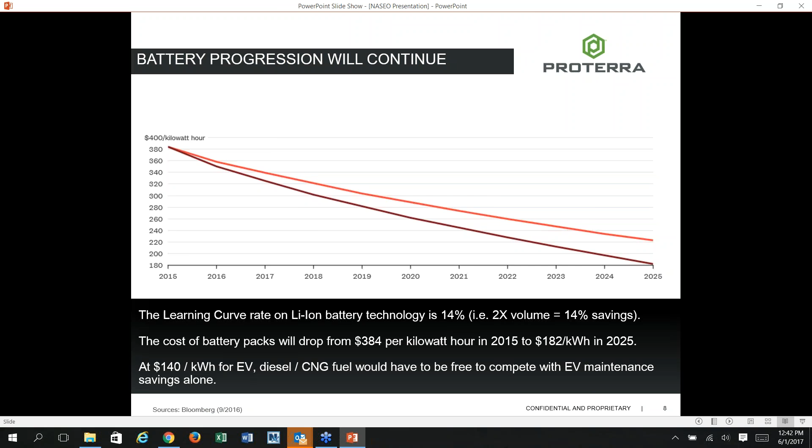So now, just a little bit about the Proterra bus. It's a purpose-built bus that offers the highest performance and flexibility in terms of energy storage, and we also offer multiple charging options and multiple ways to make the purchase, because as I showed you earlier, we are still more expensive than a diesel or CNG competitor.

Now, what makes us different? Well, our buses are made of high-tech carbon fiber reinforced composite material. Think Formula One race cars, offshore power boat racing, or like Learjet hulls.

So it's super strong, it's lightweight, it doesn't rust. We have customers in New England that will show us a comparison of buses after 4 or 5 years. Our buses have no rust, while the other parts of their fleet are covered in rust.

And LA Metro just put out some information on their composite body buses that are looking like they'll last almost 18 years, the shells, without flex or degradation. That composite material allows our bus to be lighter and have more seated passenger space, because the batteries are down outside the passenger compartment, lining the floor of the bus. That lighter weight also contributes to a higher efficiency rating, allowing more miles per kilowatt hour.

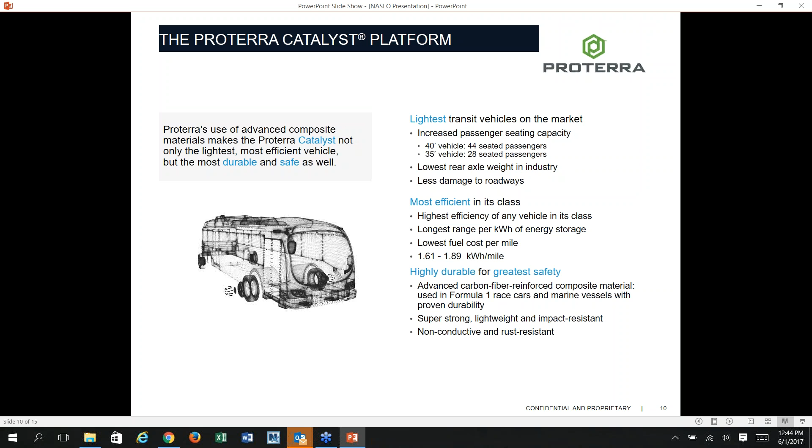As I mentioned, we have multiple charging options. When we first started, all we had was the high power overhead, which will be featured in the upcoming NREL study you'll hear about shortly. But now we've launched a depot charger at the request of our customers. They wanted to more mirror their fossil fuel experience - they want to charge overnight and run all day.

Along with one other manufacturer, we've chosen to use the plug-in standard that's accepted across the board in the U.S. and used for all passenger vehicles, J1772 CCS. That allows a municipality or transit agency, working with their public works department or other fleet vehicles, to use the same charging infrastructure for their buses as for light-duty vehicles, medium-duty trucks, repair trucks, and fleet cars for the city.

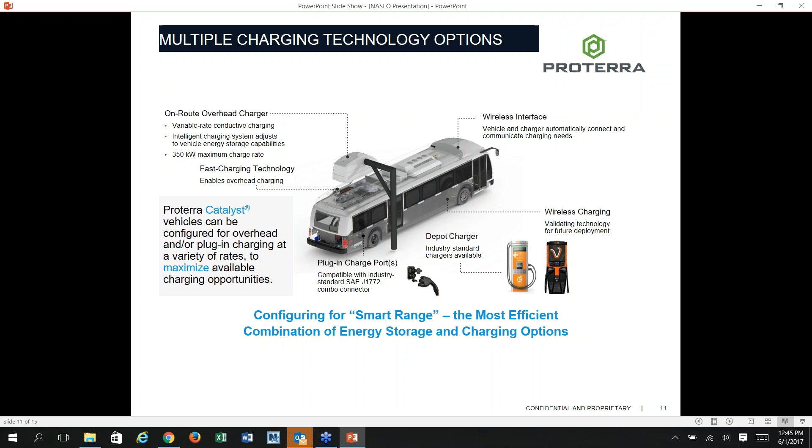So they don't have to have multiple charging scenarios - they can use one technology for multiple options. This charging standard is widely deployed and ubiquitous, and there's a host of entities out there that know how to install it to great advantage. That's one of the other reasons - there are standard groups within Black & Veatch and others like Schneider Electric. There are multiple contractors across the U.S. that have deployed this type of charging infrastructure, making it an easy transition for transit agencies.

Now, you'll see that we are right now not at cost parity - we're more expensive, but we have a lower operational life cycle cost over the life of the vehicle. We haven't reached the 12-year life cycle mandated by the federal government, but the numbers we're achieving now with our second-generation bus indicate total cost of ownership savings in the neighborhood of $400,000 to $450,000, depending on your electricity costs. That's over a full 12-year federally mandated life cycle, and most transit agencies keep their buses on the road longer, 14 or 15 years even, which would increase their savings.

Electric motors are very simple - they've been around forever. Fewer parts, less maintenance, et cetera. So that's one of the drivers of being able to recover that total cost of ownership in relation to the higher upfront cost. But we realize that's still a problem.

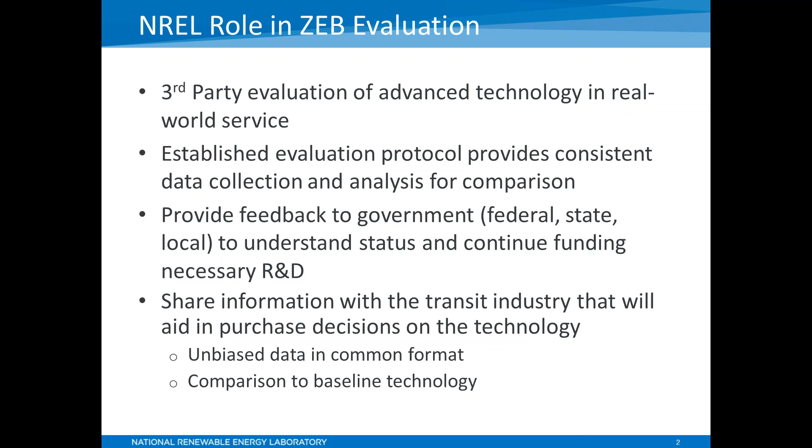There are a number of OEMs besides Proterra that are offering electric buses, and for me, electric buses or zero-emission buses include both battery electric and fuel cell electric. The rest of the presentation is going to focus on fuel cell or battery electric, but here's a list of manufacturers that are providing a number of different sizes for battery buses and fuel cell electric buses.

That includes BYD, and Eldorado National has a fuel cell electric bus. Gillig has recently started a demo of their first battery electric bus. New Flyer does both battery and fuel cell electric buses. Nova has a battery bus, and of course Proterra has battery buses, some with either fast charge or plug-in with extended range. You've already heard Kent mention those from Proterra.

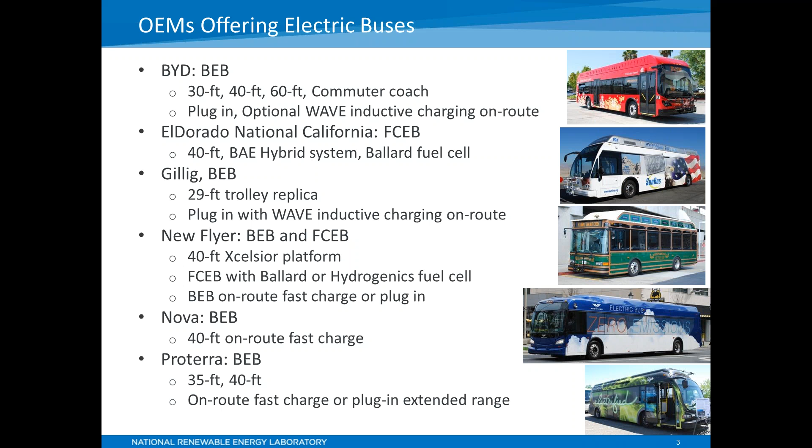To look at what our objectives are with our evaluations, several years ago in 2012, DOE and the Federal Transit Administration established targets. A selection of these targets is shown in this table. They were developed originally for fuel cell electric buses, but the performance targets are the same as what you'd want any bus to meet, so we apply those to our battery electric bus evaluations as well. We look at them compared to the targets, but also compare them to conventional technologies in the same service.

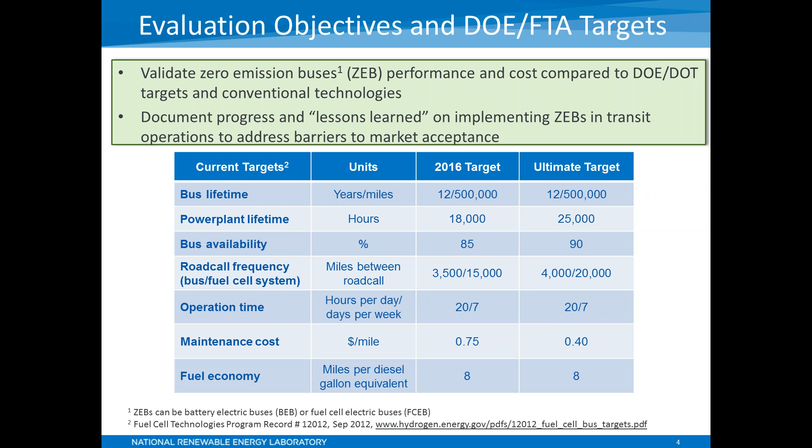This chart shows you the status of the battery electric bus fleets that we're working with. Right now we're working with 4 fleets, but this includes the 2 that we actually have published data for. That includes both Foothill Transit and King County Metro, and both happen to be Proterra fleets. I'm going to show you some detailed data once we move forward, but this gives you the overall status as we see it right now. The columns show you the bus with the minimum, the bus with the maximum, and the fleet average, as if all those buses were one fleet.

You can see that some of the targets that have been set have already been met. We're seeing 2x fuel economy compared on a diesel gallon equivalent basis. The road call frequency is much higher than the targets for bus miles between road calls - the target's 4,000. For the energy storage system, it would be similar to what we'd see for the fuel cell; we want to see at least 20,000, and you can see it's much, much higher than that.

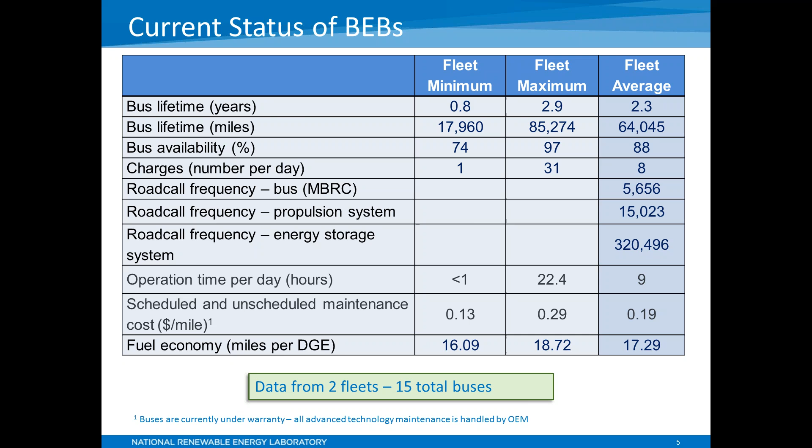So first we'll talk about our experience with Foothill Transit in West Covina, California. They started their battery electric bus program with a demo, a pilot project with 3 buses, but our evaluation starts with their 12 buses that they got and put in service in April 2014. We've been following this fleet for a couple of years now, and we have one report that's been published, with another in its final stage that should be published and posted in the next 2 weeks.

So 12 buses - these are the 35-foot Proterra buses with fast charge on route. And for comparison, their baseline fleet is the CNG NABI fleet, which are 42-foot buses.

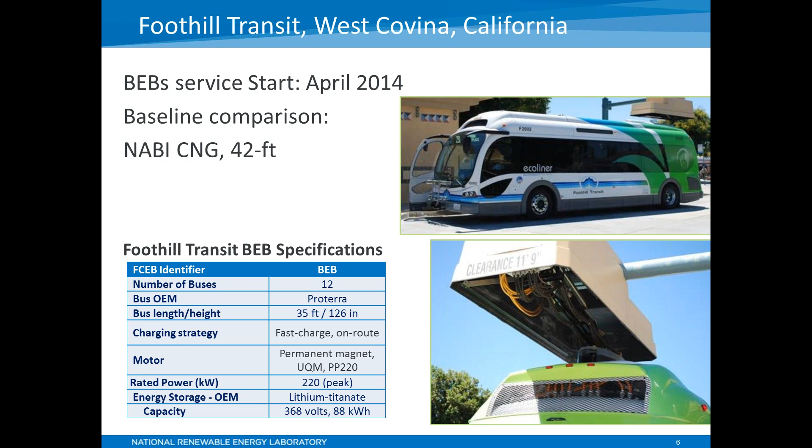This first chart shows you the efficiency, which we look at in diesel gallon equivalent. For both the CNG and battery buses, we have converted those to diesel gallon equivalent. The battery bus is in green, the CNG bus is in blue. You can see we've got about 4x higher than the CNG buses. The cost of electricity makes it a little higher to operate per mile because of demand charges.

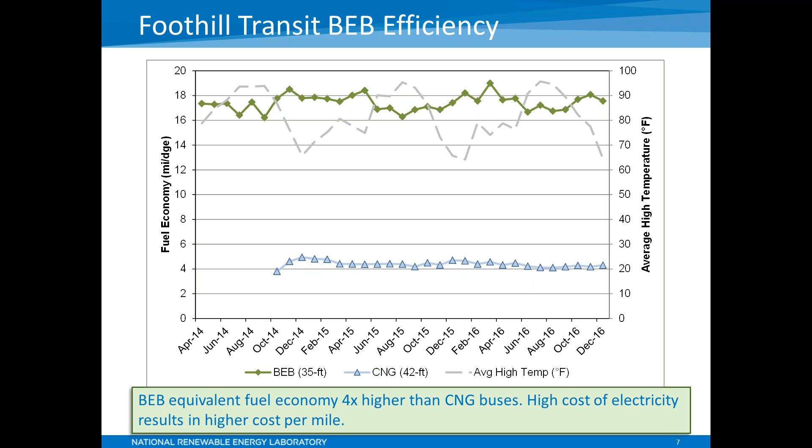If you look at that light gray line, that gives you the average daily high temperature for the month. You can see in some cases you have a little bit of fluctuation based on accessories. You might see the efficiency go up or down, whether it's summer or winter driving.

This chart shows you availability, and our availability numbers are if the bus is available for morning pullout, and this is the monthly average for the fleet. You've got the battery buses in green, CNG buses in blue, and the general transit target of 85% availability. Both the battery buses and CNG buses were new when they went into service, and they have really good availability over the time. The vast majority of the time it's over the target.

The few times that it was not over the target, it was usually due to bus issues. So the overall availability for the battery buses during this period was 90%.

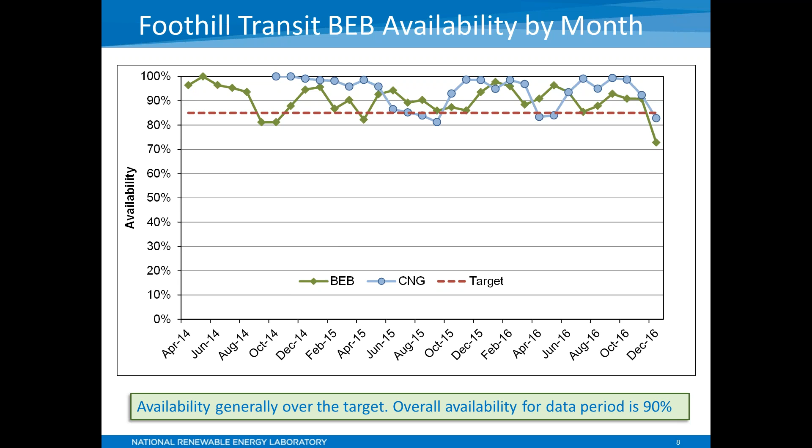Looking at what the reasons for unavailability are, these 2 pie charts show you the 90% availability, 10% of the time the buses were unavailable, and the second pie chart breaks down the reasons for unavailability. If you count the preventive maintenance, which is your PM, and the bus, more than half the time it was bus issues, things like doors, wheelchair lifts, things like that that might cause a problem with the bus.

2.8% of that time it was some electric drive issues. In some cases those were due to some software upgrades that, once they were done, they didn't have issues with the problems after that.

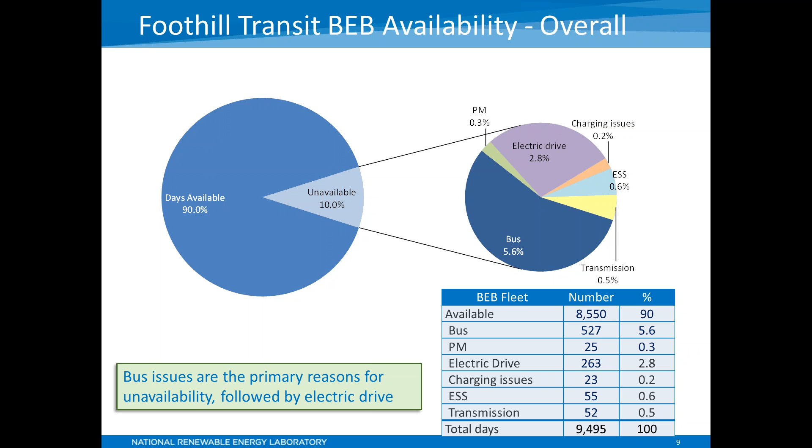If you look at reliability, transit measures reliability as miles between road call. These 2 charts - the chart on top gives you the overall miles between road call for the battery buses and the CNG buses, and the ultimate target set by DOE and FTA of 4,000 miles between road call. You can see that we're already meeting that target with the battery buses.

What this number is, it's chargeable road call, so it doesn't include things like head signs or fare boxes or things like that. It's something that would stop the bus from being operated on route or would cause a safety issue and have to be pulled from route. So you can see the battery buses that we're seeing right now have met that target.

If you look at the lower chart, it shows you propulsion miles between road calls. If you look at only the road calls that are due to problems with the propulsion system, that's the light green line for the battery electric buses, and it's hovering right along the target for the battery systems. Then if you look at the orange line, that's road calls only due to the energy storage system, and you can see from the chart that it's a steady increase, meaning they're having no road calls for the battery systems itself, which is really positive for the technology.

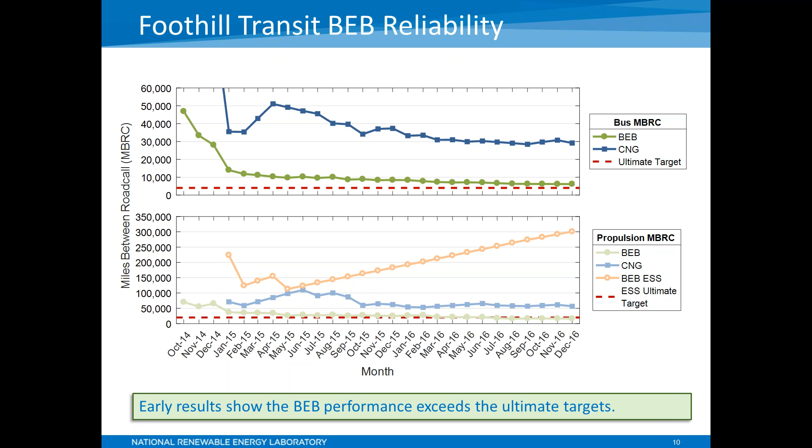So that was Foothill. Let's switch to King County Metro. They have Proterra buses as well, but these are their 40-foot Catalyst buses. There's 3 of them, and they're also fast charging. They have 8 more buses on order.

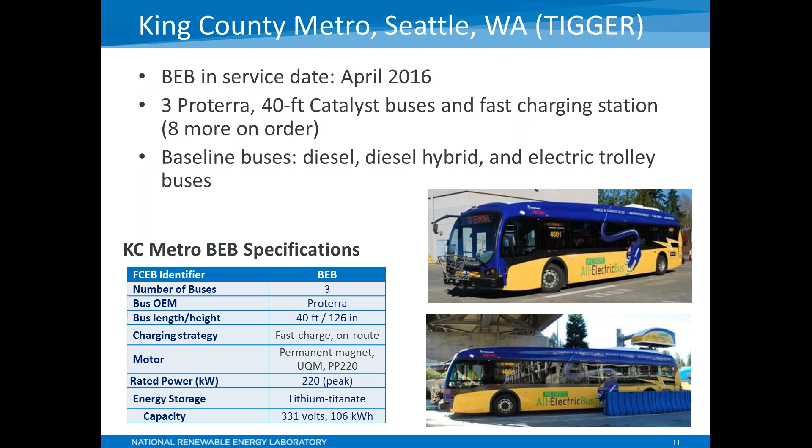Interesting thing about King County, we have 3 different baselines for King County. We've got diesel hybrid, and electric trolley, and all of them are new, so we've got some great apples to apples comparison. They're all 40-foot buses. You can see some of the specifications for the buses at King County.

If you look at the efficiency for the King County buses, we've got a report that was just posted that has this data in it, but also diesel gallon equivalent. You can see the battery buses are still more than 3 times higher than the baselines in similar service. You can see the diesel fleet, the standard diesel fleet, in the brownish color, and the hybrids in the blue, and 2.6 times higher than the diesel buses and the diesel hybrid buses.

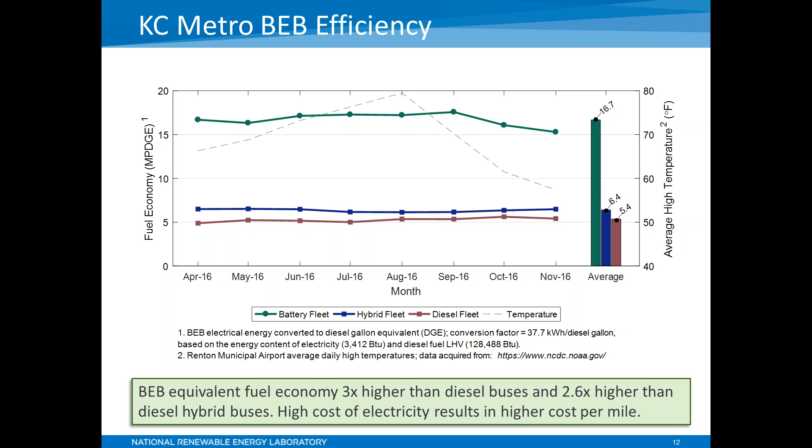Once again, the cost of electricity for this fleet - they have some high demand charges, so they have a little bit higher cost per mile at this point because of the charge for electricity.

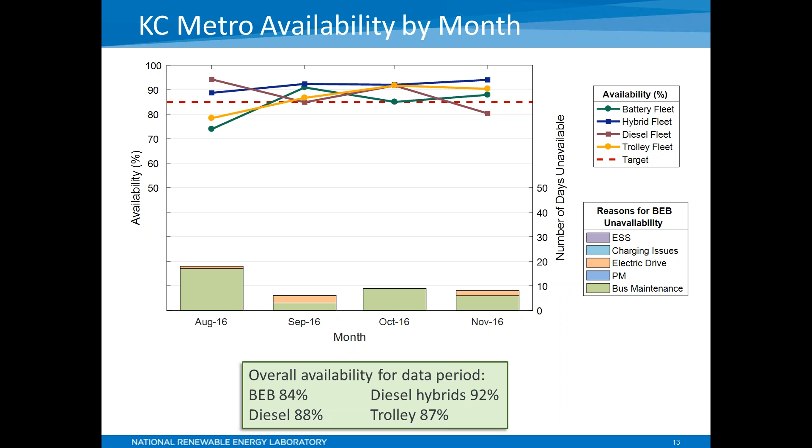If you look at availability for the KC Metro fleet, you can see all 4 of our baseline buses, the trolley fleet included here, and they're all right about the target or over the target, including the battery bus fleet. The stacked bars at the bottom show you by month the number of days unavailable by category. So you can see that bus maintenance is the primary category that's caused issues, followed by a few issues for the electric drive system. And at the bottom, you can see the overall availability for the period, with the battery buses being at 84% over that time period.

One of the things we've talked about with our fleets is what are the remaining challenges and barriers for zero-emission buses. For battery buses, the fleet needs to work on build out of opportunity charging stations if they're going to do fast charge stations. Also look at how to expand to larger fleets for garage chargers. If you're going to plug them in overnight, you've got to have a spot to do that, and that can be a challenge for fleets. It's not unsurmountable, but it's something they have to think about as they add battery buses to their fleet.

Routes for the technology: if you're using fast charge, you need to think about what routes you have and where you can put those fast chargers to accommodate those routes. If you're doing in-depot charging with longer range, then you can use it on other routes within the service.

The challenges of electricity rates and demand charges is one of the big ones our fleets have seen, and most of them have worked with the local utilities to try to work different rates, waive demand charges, or at least get special EV rates that would keep them from having to spend a lot of their money for electricity. I mentioned scaling up for larger fleets, that they need to figure out how they can accommodate plugging in and charging a larger number of buses and parking them.

One of the things we need to see is the training transition for the maintenance staff, and this is happening with some of our fuel cell fleets, and I think we're starting to see that with the battery fleets as well. We need to see that maintenance being transitioned to the actual fleet.

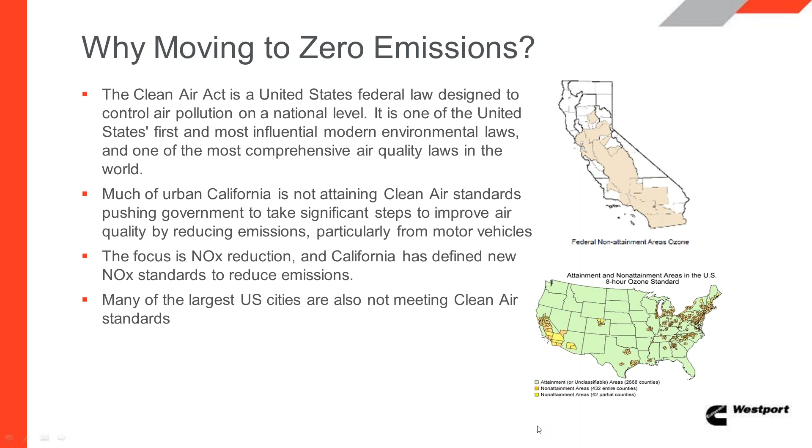Next slide is basically our new marketing term right now, which is move to zero. We are very close to zero right now with our natural gas products. In 2018, at the end of this year, 2 of our 3 engines will be at 0.02 gram NOx, and the 6.7 liter engine will come in at about half of that, so 0.1 gram NOx. Pretty significant when you compare that with other combustion engines, particularly diesel engines that are at 0.2 gram NOx.

So we think that's a pretty big deal, and I think we've got quite a few partners along the way that believe in the same thing. We're really excited about this.

Next slide. This graph basically shows the move to zero with a sub-zero carbon intensity. When you use our natural gas engines with renewable natural gas, you go into a negative number. So if you are an operator, a fleet, or a property looking for a maximum amount of greenhouse gas reduction and NOx reduction combined, we think our engines get you to that point very quickly.

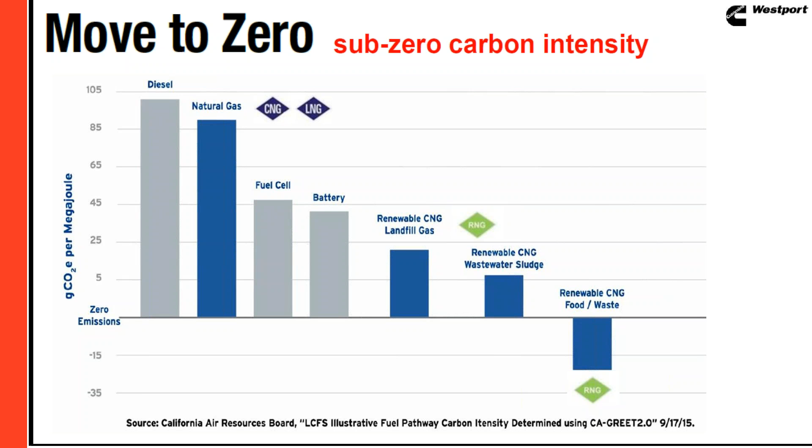Next slide, number 8. As I mentioned before, we are upgrading a lot of our engines for 2018. Both the 12 liter and the 9 liter will be at 0.02 gram NOx. They will have onboard diagnostics deployed, and I consider this to be a top-notch option for anybody looking to move their properties to ultra-low emissions with a very clean product.

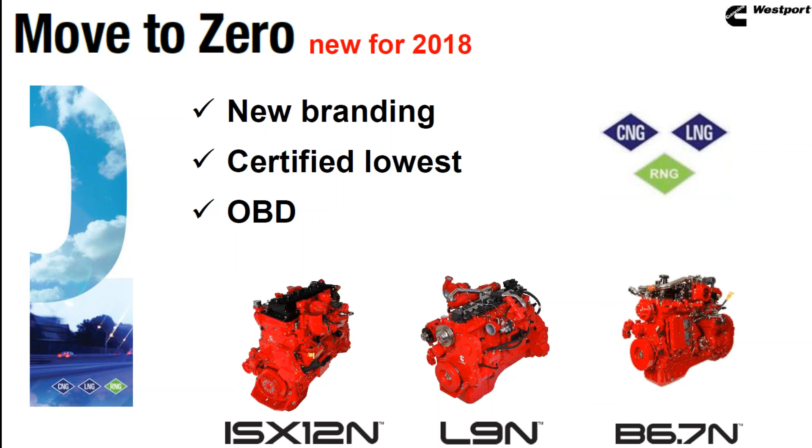Slide number 9. This is the basic information of the profile for the 12-liter engine, typically used in less-than-truckload applications, Class 8 trucks. Amazon, UPS, FedEx will be operating those.

UPS is the largest fleet in the United States running our natural gas 12-liter engines, and they'll be buying a significant amount of our near-zero, ultra-low NOx engine, actually running on renewable natural gas. That helps their environmental sustainability program corporately. They're not alone—many other companies, including Amazon, want the cleanest footprint possible, and we think our engines will get them there.

So the 12-liter engine is good for refuse, port drayage, regional haul distribution, dedicated lanes, Class 8 trucks. That's predominantly where you'll find that engine, and it's available through all of the truck OEMs in North America.

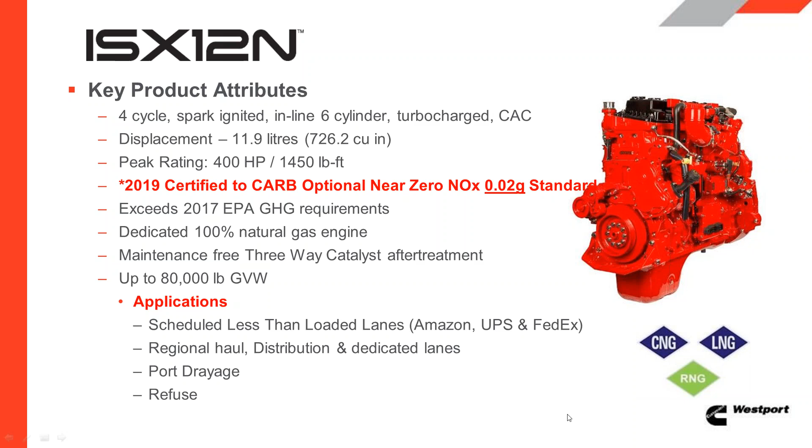Next, slide number 10. The 9-liter engine is 0.02 gram NOx, available today, and will be OBD certified by the beginning of next year. As we launch, there will be a few enhancements, product upgrades. Target markets for that application are bus, school bus, truck, transit, and refuse.

It's a pretty dominant engine. It's been around in this variant since—and the 0.2 gram NOx variant has been around since 2008. We're going to obsolete that 0.2 gram product at the end of this year, and the only engines we'll have on the 9-liter will be the 0.02 gram NOx, which is the lowest standard.

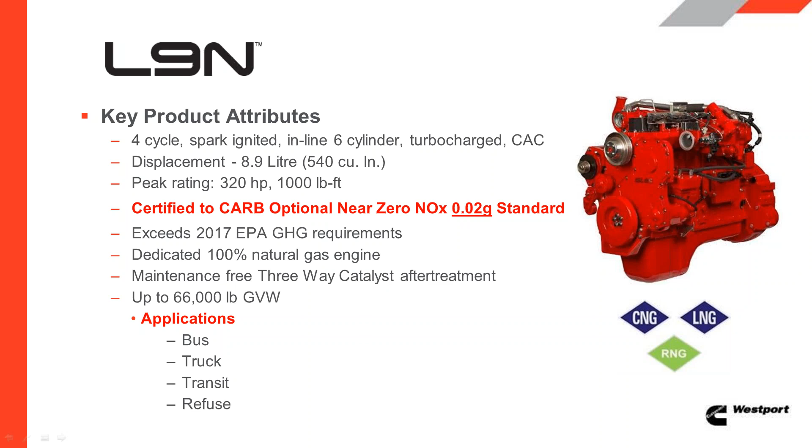Next slide, just to drive that point home a little more. We have a CARB certificate here, and as you can see, our measurements—our NOx measurements—show we actually operate that engine at 0.01 gram NOx, not 0.02 gram NOx.

We are actually operating below the standard, and I think the most recent studies coming out of University of California, Riverside show our engines actually operate cleaner at lower speeds and lower idle applications, whereas some of the diesel engines they've tested actually go up. So we think this is a solution that's available today—the lowest cost option, and it gets you to emission levels that exceed any government standard set today.

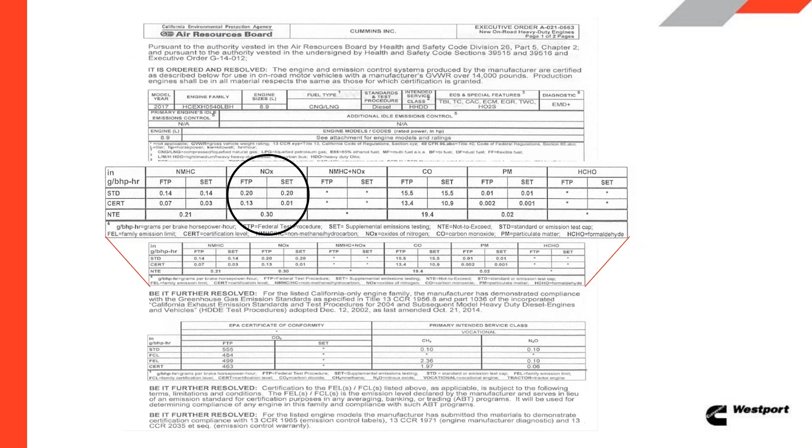So the last slide on engines here—slide number 12. Casey, can we go back to 12? That's a 6.7-liter engine.

We think that's going to be a good solution, and like all of our engines, it doesn't require any unusual or extreme infrastructure to support this product. Our engines are built off Cummins diesel engines, with about 80% of the parts already manufactured on the diesel side—we've just converted these engines over to natural gas, so it's a time-proven product. It's available through all of the OEMs in North America, and we're looking to expand the use of this 6.7-liter engine to some other markets very shortly.

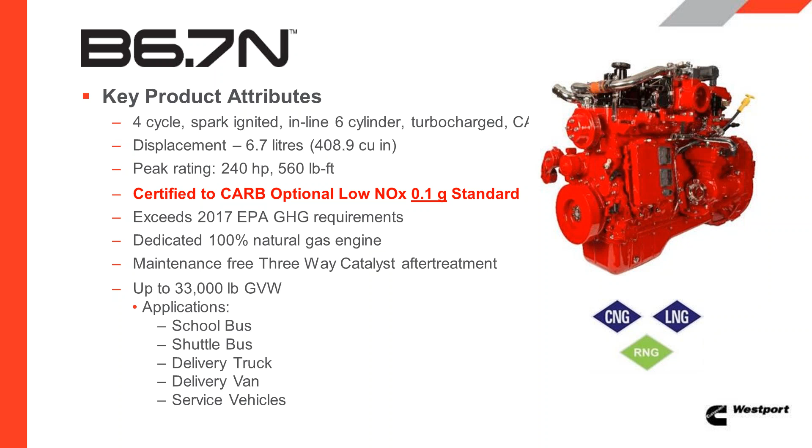So slide number 13—we just talked high level here on the why move to. Moving to slide 14: from an environmental durability standpoint, these engines will be 90% below standard in NOx and 90% below in PM, and CO2 equivalent is about 16% below standard. When you're using renewable natural gas, that's obviously the most desired way to get to extremely low emission levels, while also helping greenhouse gas reduction.

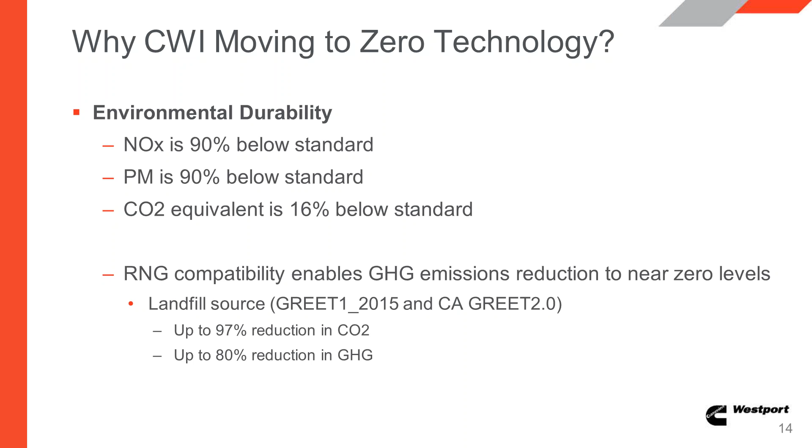We think this is a very good solution, and we're beginning to see more and more of these products being purchased by transit companies and school bus companies. So it's beginning to get traction, and again, it's available today, and it's the lowest cost option.

Slide 15 is really important to this whole thing: our product is not disruptive to existing infrastructure that's out there today. It doesn't require an extraordinary amount of facilities or hardware, just the refueling sites, which are pretty well populated across the country today. So it fits the current transportation and people and goods movement truck models. No need for radical changes in vehicle technology, and it fits the current community models with no need for radical changes in transportation or support infrastructure.

Cummins has about 2,000 certified dealers in North America, and for those areas that don't host natural gas, should they show up, they are all capable of getting certified to take care of the product. We have a very strong support infrastructure in North America for our natural gas products, and that's all in place, so we don't have to make any changes to make that work.

It also meets our energy source goals. It delivers on energy independence initiatives and fossil fuel reduction initiatives through renewable natural gas. These are key components to the whole discussion. At the end of the day, as state governments try to enhance air quality or address non-attainment zones, we think this product is available today. The 12-liter will be available at 0.02 gram NOx starting in 2018, the 9-liter is available today, and the 6.7-liter engine is available at 0.1 gram NOx.

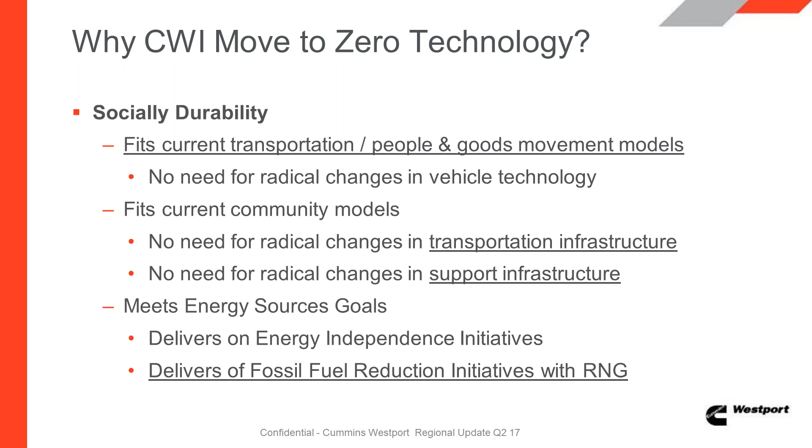More and more fleets are stepping into natural gas. We think it's a solution for resolving non-attainment issues that some states are facing today, but it's not at a cost penalty - it's the lowest cost option available today. And with that, I'll hand it back to Casey.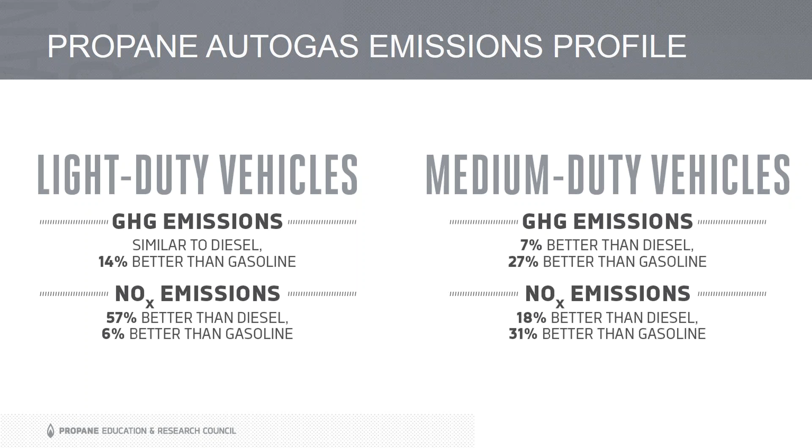It's important. The other emission I love to talk about, because we don't talk about it enough, and obviously it's a huge improvement as we talk about a propane fueled engine, is just noise.

That's really been an eye-opening statistic for us with the school buses - the value of a quieter engine rumbling through your neighborhood, the value of a quieter engine to a driver in better control of the bus, a driver more aware of the external and internal surroundings, and even what that does to the children on the bus in terms of calmness. Noise is clearly a pollutant, an emission, and I want to talk more about it.

I think that's the final emission we're really proud of having made significant reductions in. We're always proud as an industry to talk about how we deliver all of those investments at the cheapest price. In almost every reasonable application of the VW settlement monies as it relates to the Environmental Mitigation Trust Fund, you cannot make a better investment if the criteria is dollars invested per ton of NOx reduced. When you bring it all together, we think propane autogas in a school bus using these modern engines represents arguably the best investment you can make.

I think one of the reasons our investment is so reasonable, and I always like to call it out, is infrastructure. Our infrastructure is easy, it's portable, it doesn't pollute - a lot of advantages over conventional diesel and gasoline, just a lot of advantages in general. I always like to call that out because I think that's a significant benefit far beyond cost. The initial cost is easy, but it's all about the operating cost, the ease of use, the speed of fueling - a significant benefit as we talk about propane autogas.

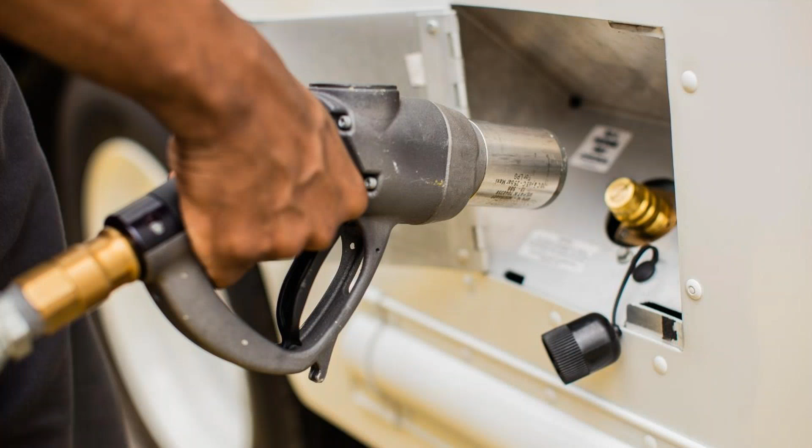One is here today - we've changed the fueling nozzle. We really advocate for this style nozzle. It's cut our emissions tenfold. You can never use the word emission-free, but for all intents and purposes, no one is ever aware of any emissions - you don't hear it, you don't see it, you don't smell it. It's made the whole process so much safer. This is technology we brought over from Europe a couple years ago, and now we've really standardized on it around the world. But if nothing else, it's a simple acknowledgement that every detail is being looked at as we think about how to move this whole industry forward.

I'll show you a picture of a direct injection engine, but before that I want to talk about the fuel, because there's a lot of excitement about renewable natural gas - we're well aware of that. We don't talk about it much in the U.S., although we're just finishing up our studies now, driven to us by California and the low carbon fuel standard, because we knew we had to be able to talk about renewable propane. Renewable propane exists today in refineries across Europe and Asia. We're in contract conversations now with multiple refineries in the U.S. that are capable of making renewable propane. We really love what we see for the carbon intensity values. So again, we're not only innovating on the dispenser side, now we're innovating on the fuel side.

Finally, fortunately for us, innovation was occurring on the engine side too, because in order to meet the CAFE standards, you see most engine manufacturers going to direct injection. And I think, by the miracles of chemistry perhaps, propane behaves in a direct injection engine even better than it does in a port injected engine. As we see the matriculation of DI into the marketplace, we'll continue to see results that, for a user, mean better fuel economy and a lower operating cost. For us, we see it even as a reduced initial cost, because we're using more stock components than we used to. So we're having tremendous success, not only on operating costs, but on initial costs too. And because we're more fuel efficient, we continue to see better emissions.

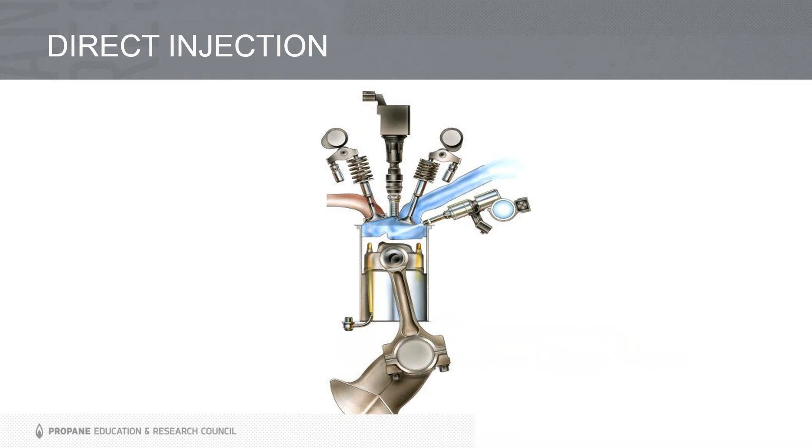Thank you very much, Tucker. I appreciate it. So I hope everybody can see my screen now, but like Cassie and Tucker mentioned, I'm Chelsea Uphouse. I'm the marketing manager for Roush CleanTech, and I appreciate a few minutes to talk to you guys about what we've been doing on the propane side and in the medium-duty truck world and school bus.

But before I get started on the products, I just wanted to give you a brief overview of who Roush is. A lot of people know us as the racing team, and that is all the same Roush. We have 4 different divisions. Roush Industries is really our backbone. That's the engineering arm of Roush, where we do all of our prototype testing and a lot of work with the major OEMs, Ford, GM, and Chrysler, as well as many others.

Of course, we have our racing side, which we have many drivers out there. We've been a pretty winning team in the years past, and we're still doing pretty well. We're hoping for another good year this time around. Roush Performance is our high horsepower Mustang and F-150 division. So we make cars go really fast, and we make sure that they look cool while they're doing it. And then CleanTech is our alternative fuels division.

This is the one that people on this call are probably most familiar with. We do propane class 4 through 7 vehicles, as well as school buses, and then we've also just recently gotten into CNG school buses as well.